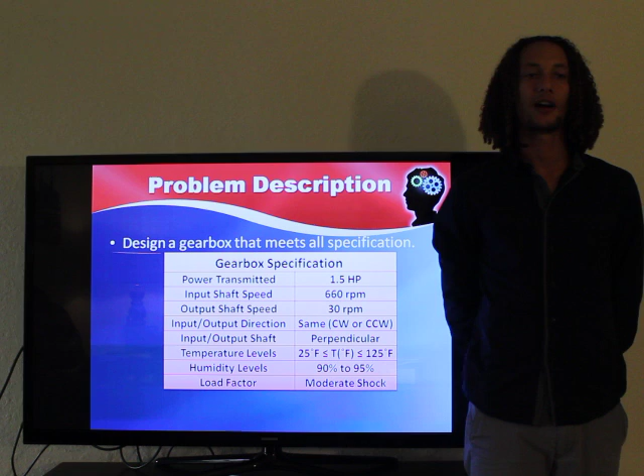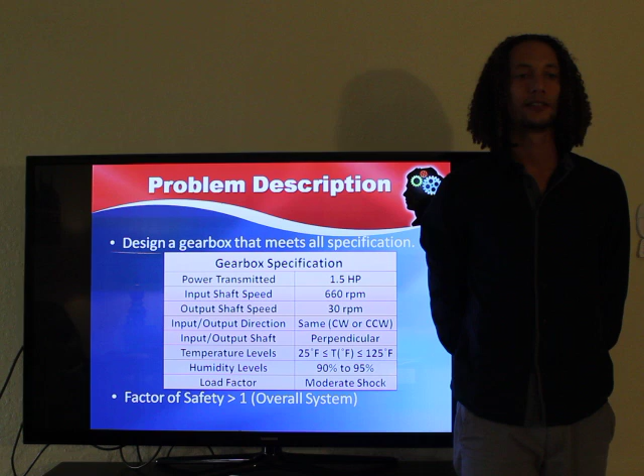Today we're going to talk about gearboxes, specifically our 4-stage gearbox design. Some initial requirements that need to be met by our system are input horsepower of 1.5, transmitting motion from 660 RPM to 30 RPM perpendicularly, and both shafts will either spin clockwise or counterclockwise. Our transmission will also withstand moderate shock and achieve an overall factor of safety greater than 1. We're going to test these requirements using AGMA standards. Some applications for our gearbox can range from small household applications like paper shredders to larger applications like waste management and also centrifugal water pumps or air compressors.

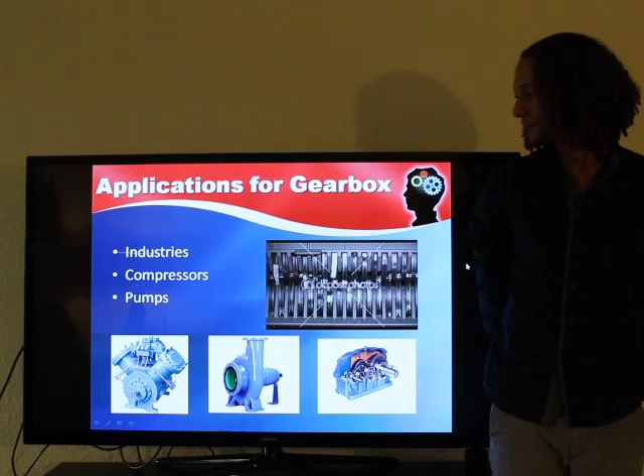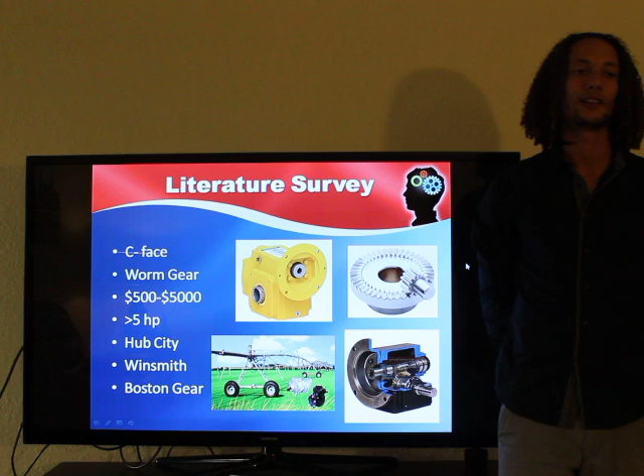When doing some research, we found some alternate designs with similar applications to ours using a C-face or worm gear. These were good because they transferred the motion within one stage, but it was very inefficient when transferring power. Notable companies are Hub City, Winsmith, and Boston Gear. I'm going to let Christian tell you some more.

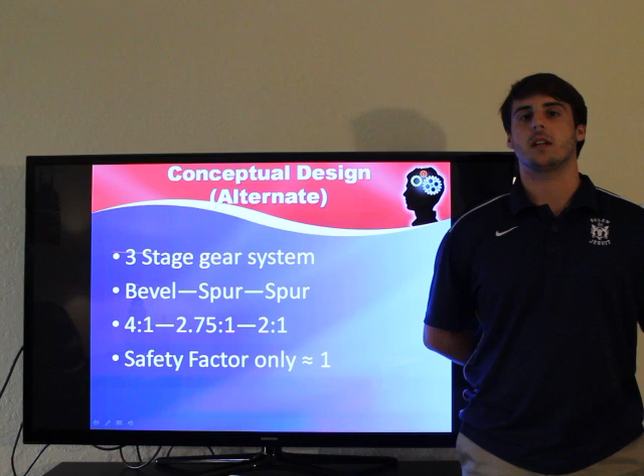Hi everybody, I'm going to talk to you about the alternative design we came up with in lieu of a 4-stage gearbox. Our alternative is a 3-stage gearbox, which is more compact. However, with this being more compact, it has a lower factor of safety due to the higher gear ratio needed at the bevel gear. It initially has a 4-to-1 bevel gear into 2 sets of spur gears, which is a 2.75-to-1 and a 2-to-1. So we decided to use our final design in lieu of this one, which has a greater factor of safety.

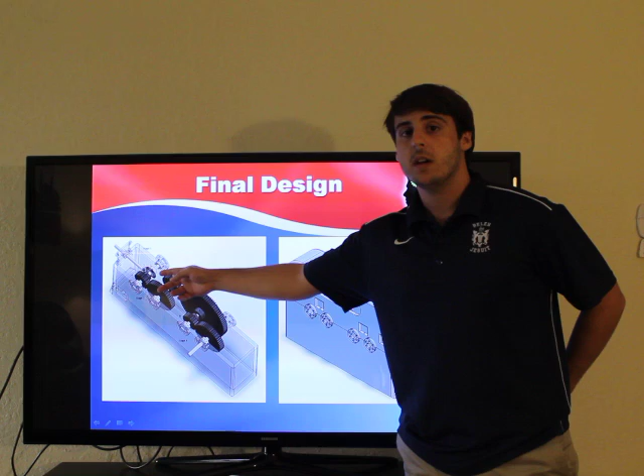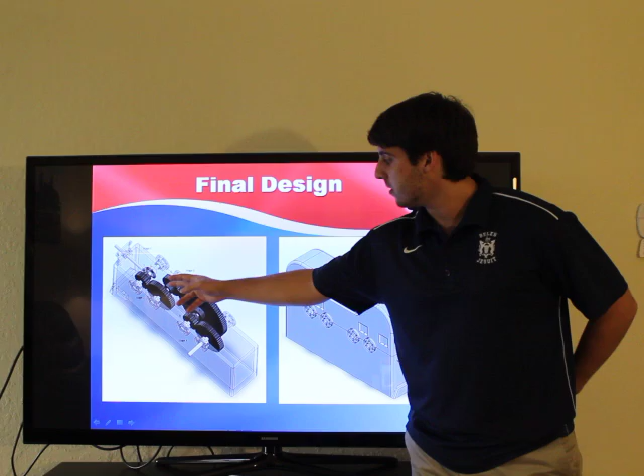Our final design is a 4-stage gearbox with an input shaft leading into a bevel gear, which is a 2-to-1 ratio, into another 2-to-1 spur ratio at a 14.5 pressure angle. All of them are actually 14.5 pressure angle. Then it goes into a 2.75-to-1 and a 2-to-1 at the end, leading to the output shaft spinning at 30 RPM.

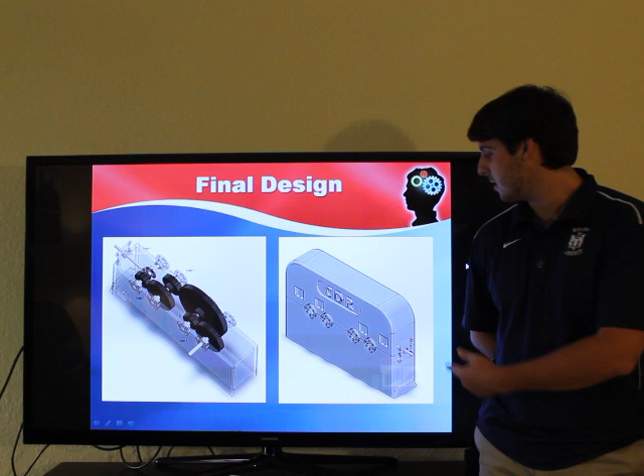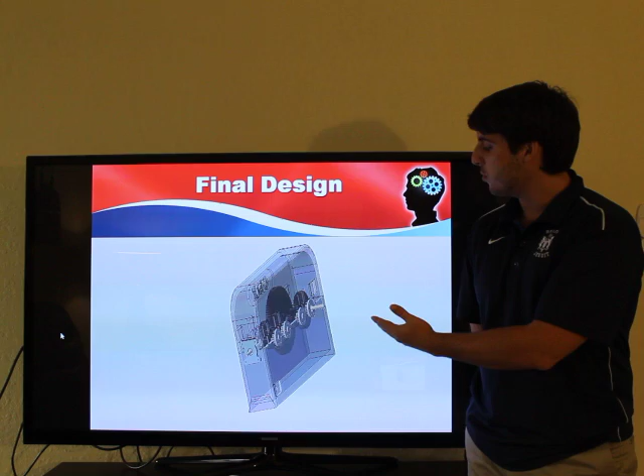And the casing is designed by Ramon. It's actually custom, it's a CDR. I'm going to show you a quick video of our design in action. As you can see in the video, as it clears away, the gears are actually moving at the right speeds, with 660 at the beginning and 30 at the end.

For our structural design, we decided to use 1018 steel for the shafts, which will be able to handle the axial and tangential loads on each of the gears, as well as the bearings. The bearings we chose from the Timken catalog are deep groove ball bearings, which will handle the axial, tangential, and radial loads from the bevel gears and throughout the rest of the gears. It's a press fit, and we also decided to use press fit keys for holding the gears onto the shafts to keep them in place.

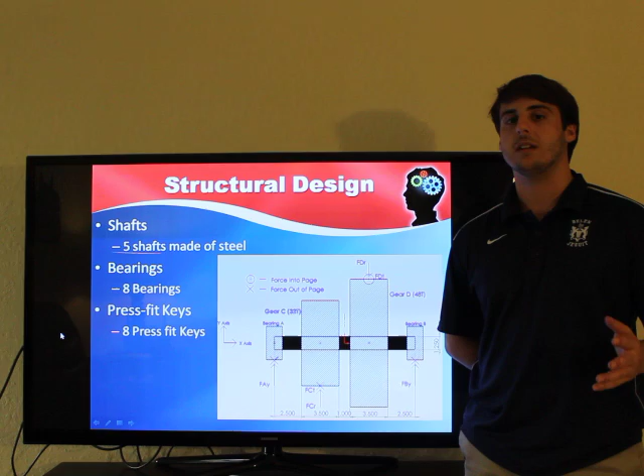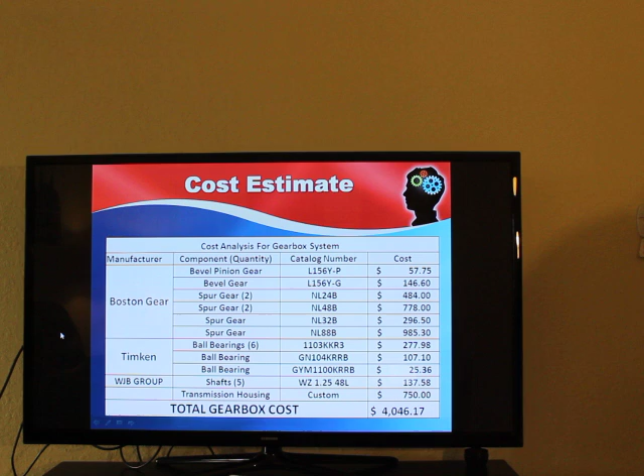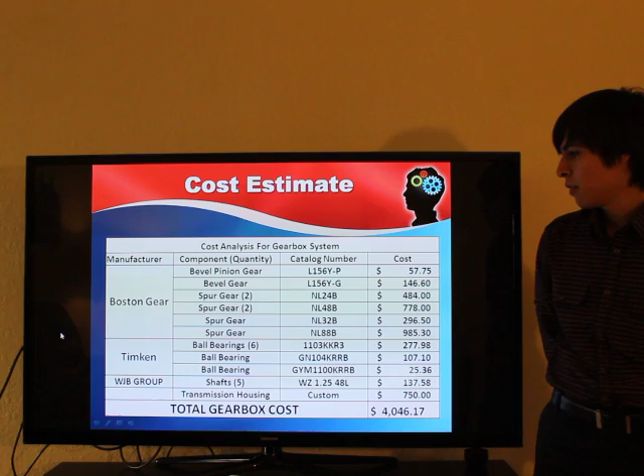I'm going to let Ramon talk to you about the cost analysis. The following table displays the total cost for the gearbox system. It shows the individual cost for all the bevel gears, the spur gears, the ball bearings, the shafts, and the transmission housing, with its respective catalog number and manufacturer - for all the gears it was Boston Gear, for the ball bearings it was Timken's, and for the shaft it was WJB Group. The total cost was $4,046.17.

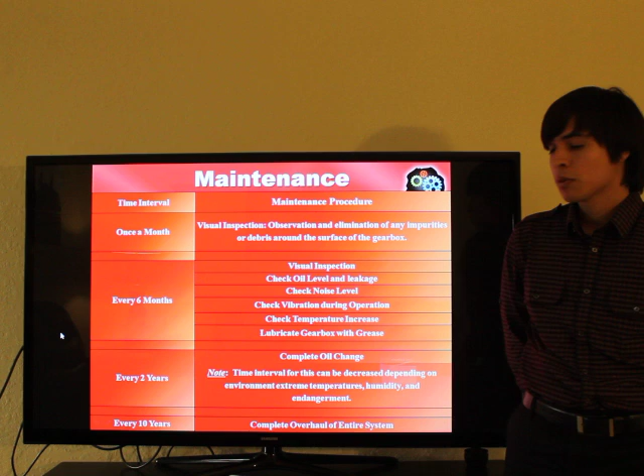This table basically shows the important processes that must be done when maintaining a gearbox system. It shows the time intervals where inspections have to be made. An inspection means they have to observe if any dust particles or debris will interact with the system and make it malfunction. You also have to check for oil levels, noise level, vibration levels, and any damages or oil leakages. And if any of these things are going wrong, then a complete overhaul has to be done of the entire system.

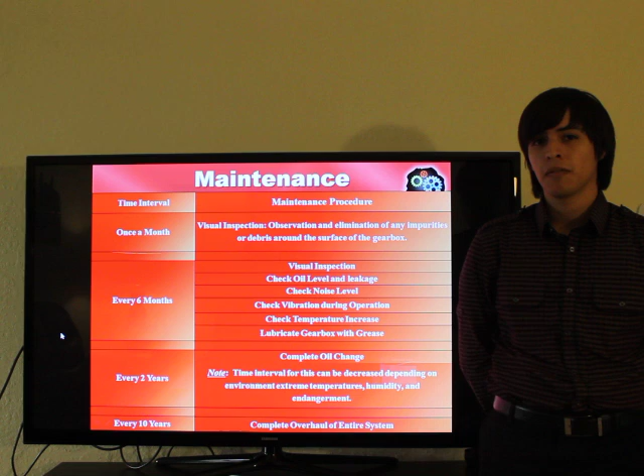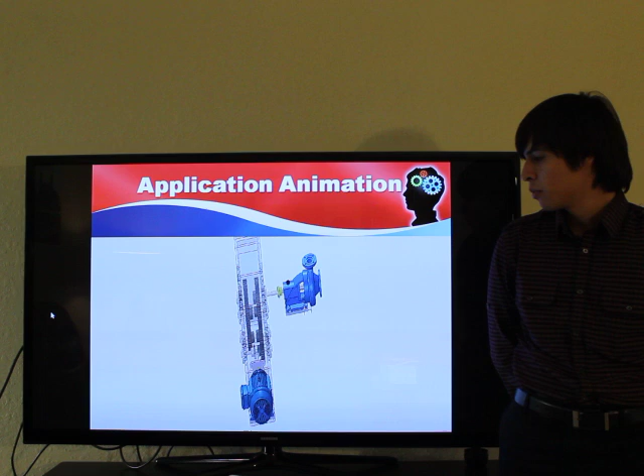This is basically an animation of an application that could be used for our gearbox system. It shows the motor and a centrifugal pump, and how the motor will transmit 1.5 horsepower to our gearbox system, which will be transmitted from the 660 RPM input shaft to the output shaft of 30 RPM.

In conclusion, what we accomplished was basically a gearbox system that met all the requirements and all the criteria. It had a good factor of safety above 1, and it's also reliable with high life. What we learned was the basic aspects of engineering in how to choose and select gearboxes, gears, and bearings for gearbox systems. For future considerations, we will probably use different types of gears, maybe helical gears, and different catalogs that will give lower levels of cost.